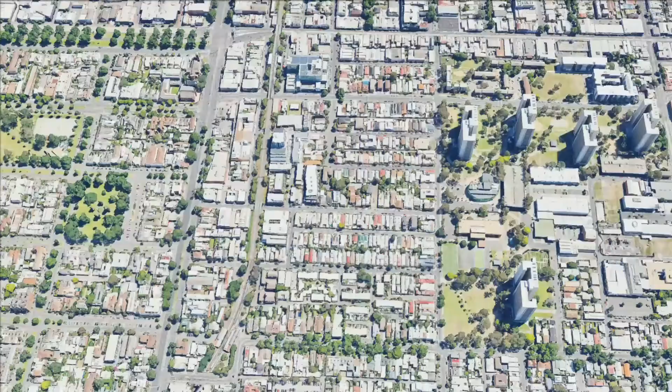It is an opportunity to push people to adapt and to explore new living patterns and spaces through their daily surroundings. The limitation of living areas prompted me to revisit the closest public spaces to our daily life, the in-between spaces, between buildings and buildings to a block, and further reconceptualize the relationship between a neighborhood and its housings.

I propose a new concept of future park neighborhood as a living unit by merging underutilized backyards, back lanes, and unused voids to break the restrictions of land boundaries, to create a more diverse and multi-dimensional public living space within a neighborhood. We share to gain more.

Richmond has a typical Melbourne street profile. Its long history has created the diversity of housing types within neighborhood blocks, and these diverse types further form irregular, rich, and interesting in-between spaces.

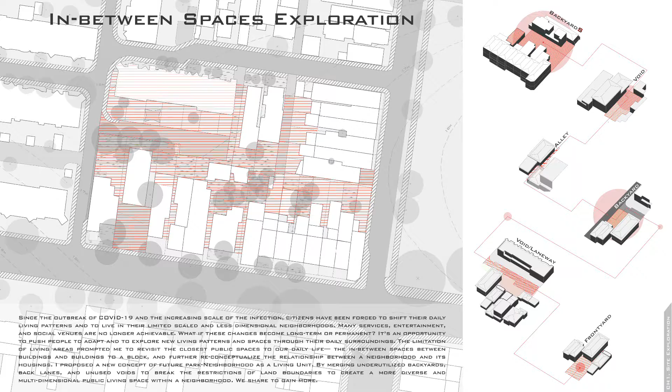I will explore all kinds of variability in it in order to expand people's quarantine area from a housing unit to a block unit. The block will provide as much as possible the experience that can be felt in the city in the past, and balance the boundaries between public and private domains.

The types of houses in the block I picked include apartment building, townhouse, and detached house. Many buildings have additional buildings behind them.

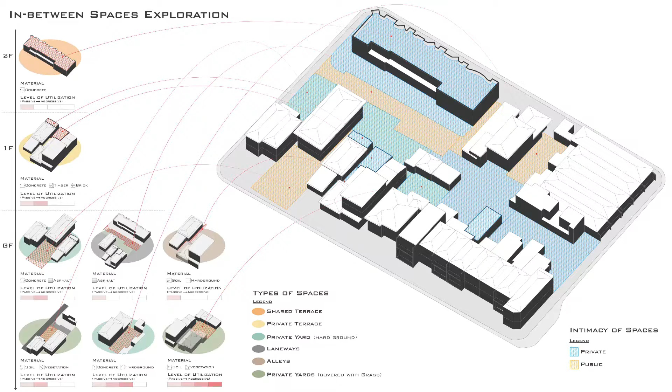I use several criteria to classify these in-between spaces, such as public and private areas, elevation, space type, degree of use, active or passive, and record the ground objects and construction materials of the existing space to analyze the possibility and variability of future space development.

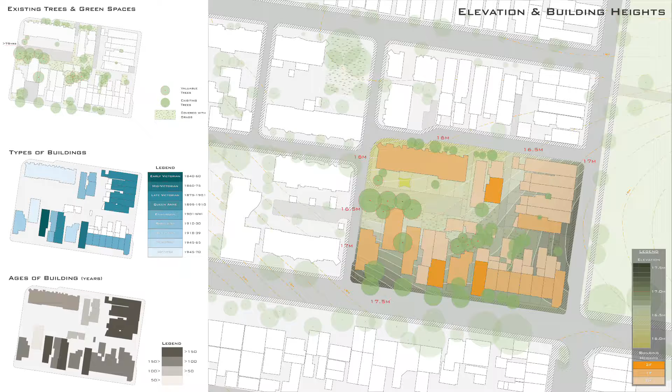Then I integrated the exploration with my survey of existing buildings, building heights, terrain records, and the distribution of existing vegetation to make a comprehensive analysis and the potential development direction of the site.

My goal is to achieve the maximum benefit with minimal intervention in the first stage of block retrofit. In order to transform the block as a living unit, I categorize 5 divisions for future use: natural, commercial, office or business, social and services oriented, and further derived 2 mixed-use spaces.

According to the above analysis, I will utilize the large and low-lying integrated space in the block to shape a more private experience, to provide residents a small unit of relaxing space, and combine with the resilience design to enrich the vegetation in the block and to softly divide the boundary between public and private spaces.

The central area will be retrofitted to provide a neighborhood center with diverse services, workspaces, and spaces to hold events, and also serve as the connection between static and dynamic living areas.

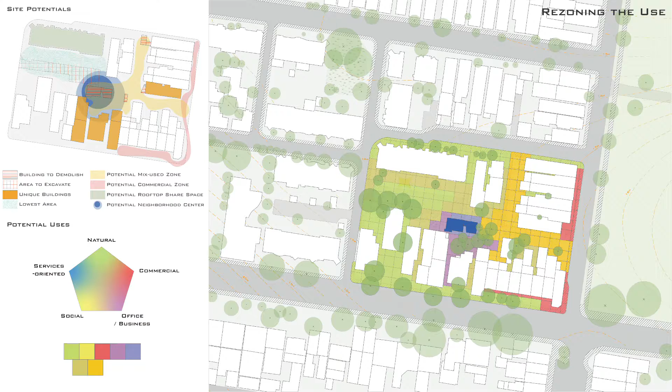In the eastern half, the dense residential form is used to integrate the backyard space to shape the mixed use of commercial and social spaces.

As for design exploration, I absorb different intervention toward in-between spacing, through architecture to landscape, temporal to permanent. I set up 3 directions to start with: scale, privacy, and length of intervention.

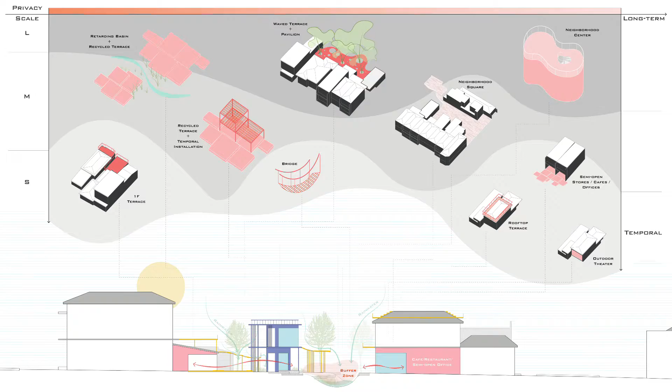I use bridges, terraces of different types and elevations, and additional roofs to connect and bind buildings in small blocks to increase the scale of the space and the privacy of different levels.

On the ground level, integration and sharing are the core. Breaking the segregation between indoor and outdoor, and the boundary between lots and lots, provides the possibility of different activities. These measures will break the traditional perception of the front yard and the backyard.

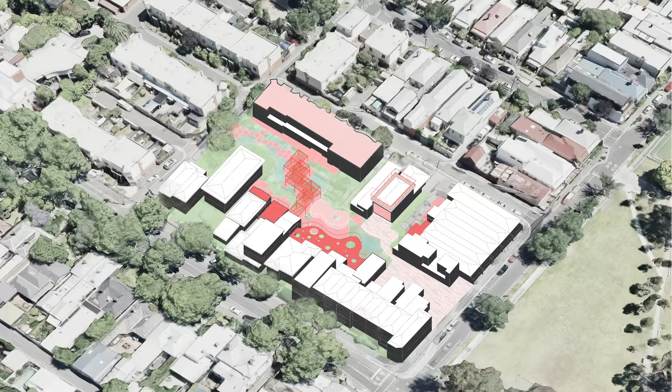The space inside the ground floor of the house will be explored. Design exploration is still in progress. In the next stage, I will further explore the possibility of building renovation and integrating external space.